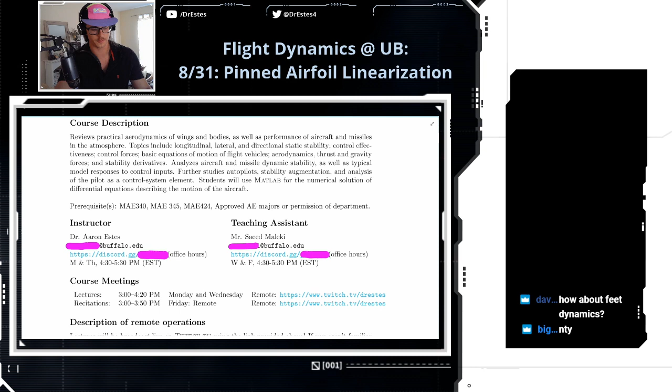Okay. So you can see I was updating this late last night. Okay. So I won't go too much into the course description as we look at the syllabus, because part of the lecture content is talking about the course. So I'll just skip this for now. But we're talking about flight dynamics.

And this is me, your instructor, Dr. Aaron Estes. And I just blanked this out here on Twitch, but you can see this if you get the PDF on UB Learns. And so I got my email. For office hours, I'm going to try Discord. I haven't tried it for office hours yet, but I think it has some interesting features. So I'm kind of interested.

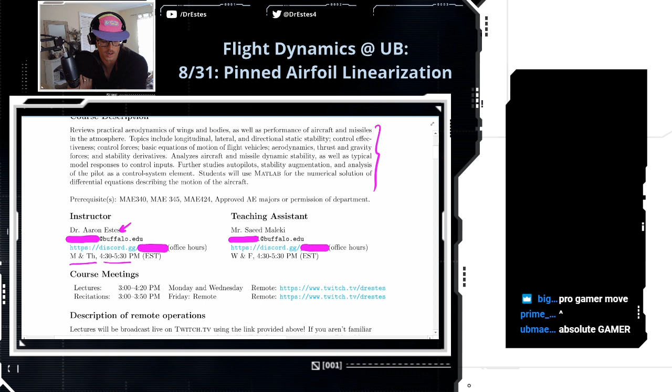Now, Mondays and Thursdays, a pro gamer move, yeah, using Discord. I know. So Mondays and Thursdays, I'm going to be there from 4:30 to 5:30. And then our TA, Saeed, he's going to be there Wednesdays and Fridays. So every day except Tuesday, you're going to be able to go to this Discord link, and it's the same link for the TA and me.

So every day except Tuesday, you can go there from 4:30 to 5:30, and you can video chat like you can on Zoom using Discord. You can also, I put a little math bot in there so you can type LaTeX formulas if you're into that. But yeah, we'll see how that goes.

Course meetings. Can you post a PDF of the handout annotated? Oh, yeah. My plan is, I'm going to write on these handouts myself, and I will post the copy that's filled in by me as well. That's my plan. So if you miss one of these, you can always go back to the video and fill in the handout yourself, but I do plan on also posting my completed notes for reference.

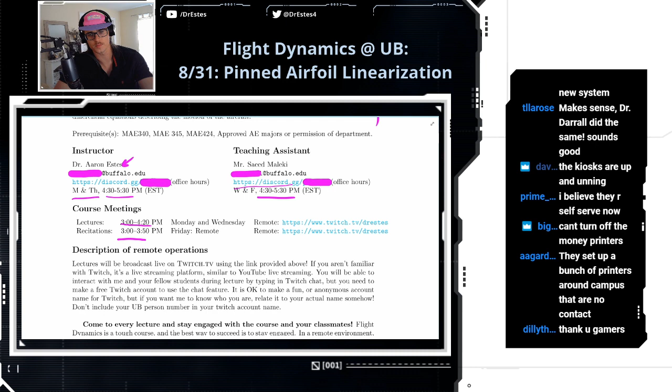And we meet here every time, so we'll keep it on Twitch. Just a quick description. If you're new to Twitch, you'll figure it out pretty quick. Let's see. Yeah, come to every lecture. That's my advice, because that's going to help you keep up with the content. Flight Dynamics is a very fast-paced course.

So I'm coordinating with Dr. Lagore's section, and we're trying to keep exactly the same pace, and it's a very fast pace. So I want you to come to every lecture so that you won't fall behind, because once you fall behind, it'll be a little bit hard to catch up. The easiest way to stay up to date, just come to every lecture. Okay. Textbook, we'll get to that next page.

Twitch chat, just be kind and courteous, common sense. Treat others the way you want to be treated. And other than that, have fun. I mean, Twitch is a fun platform. I kind of enjoy this. This is a more stressful time, COVID, but this is kind of just a fun platform. We can get together, relax a little bit, learn. And a lot of us are gamers here, so a lot of us are on Twitch anyways.

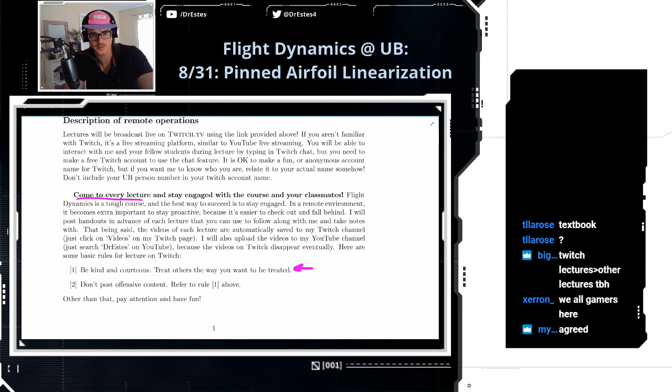Yeah, I enjoy Twitch. I just discovered chess on Twitch. Like, I'm no good at chess, but there's this guy, Hikaru. Do you guys know Hikaru? He's this grandmaster chess guy, and he streams chess. Anyways, super entertaining. I'm into that recently.

Okay, let's see. Oh, textbooks. Perfect.

Flight Dynamics Chess Tourney, I would come in last place. We could though, isn't it free, like chess.com? Oh, that's such a good idea, Flight Dynamics Chess Tourney.

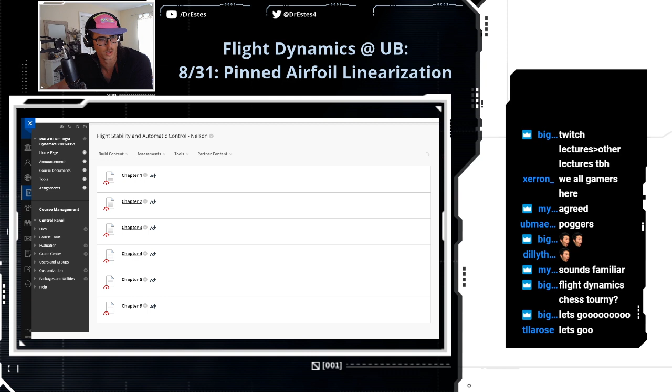So this number one, this is the book that we're primarily going to use. It's by Nelson, Flight Stability and Automatic Control. Now the nice thing is, if you go to UB Learns, let's do that. We have the first 6 chapters of that book here in PDF format. Or wait, the first 5 and then chapter 9. So we got the book right here. Beautiful. Okay. Yeah, like it says here, the Nelson textbook, that's the primary source, and the excerpts are available online.

I am not a student. Can I watch? No, you may not. No, of course you can watch. And I remember you, COD gaming lover. You took digital controls with me. Happy to see you here.

Okay, let's talk about the course requirements. You've already probably seen assignment number 1 is posted on UB Learns. And we're gonna try to have a weekly rhythm of homework. So my homework is posted at 2 p.m. on Mondays, and then it's due 2 p.m. the next Monday. And I'm just gonna try to keep that going, so just get in the rhythm of being used to that. So if you add it up, it's going to be somewhere between 10 and 12. We probably won't have a homework every single week, but expect that number of assignments.

And then for this class, we are doing 2 exams, a midterm and a final. And these are the dates that we're planning for, and we'll give you more details about that. But I think some of it is going to be a conceptual test, and I think that'll be online. So expect an online conceptual portion, and then expect a take-home portion that you'll probably have like 24 hours to work on. So more details to come, but that is my understanding of the tests right now.

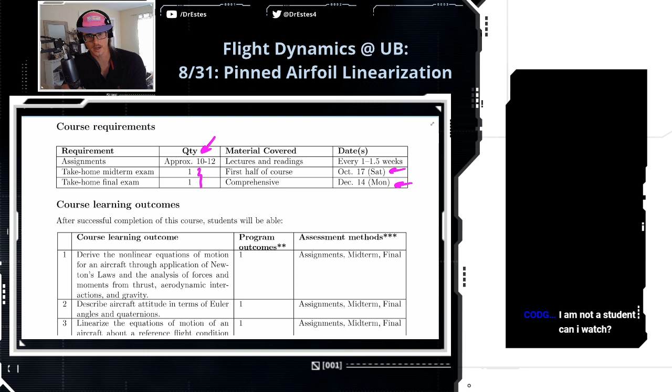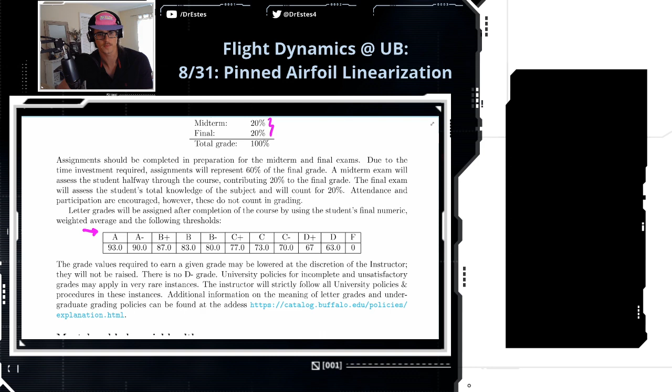Now, in terms of the weighting of the assignments, most of the weight falls on the homework assignments. So if you have 10 to 12 homework assignments, that's 60% of your grade. So make sure to do every homework and keep up with that. Come to office hours and work through it. And then that midterm and final I mentioned, each of those is 20%. Let's see, what else do I want to mention here? Here's our tentative grade breakdown, but we might change these a little bit depending on how the class is doing. And this is posted on UB Learns, so you can go through this in more detail.

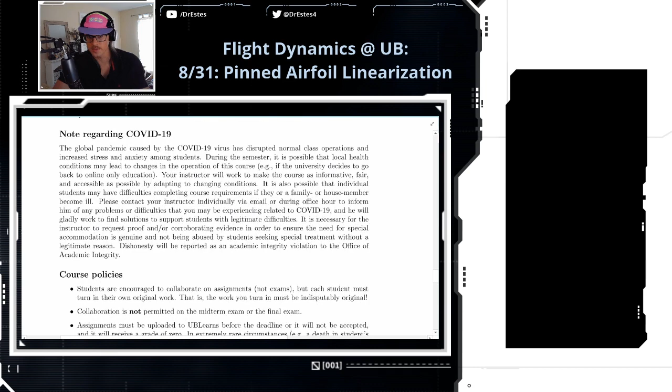Okay. And then we have a tentative schedule week by week. So go through this at your leisure. Let me know what questions you have. And that's what we're doing.

The main takeaway, I think, is stay engaged, keep up, be proactive about asking questions. If you're confused, don't feel like you're the only one. That is a myth, my friends. I went to college at one point, and I would be in a math class, and the person next to me seemed like they knew everything, and I was like, gosh, I must be the only one here who doesn't know what's going on. I find more often than not, if you have a question, the majority of the class also has a question. So just ease up on yourself a little bit. Be free to ask questions. Don't worry, guys. This class will be fun. Yeah, I think so. Okay.

With that, I'm going to switch modes to our notes for the day. Oh, good. Will the Twitch lectures be recorded and posted to be viewed at later dates? The nice thing about Twitch, as soon as this lecture is done, the video gets saved to my Twitch page. On top of that, I export it to my YouTube channel. There's some information on the syllabus, but just search Dr. Estes in YouTube and you can find the videos there as well. To reiterate though, come live, stay engaged. But if you ever miss a lecture, don't worry. You can catch up on it later in the day.

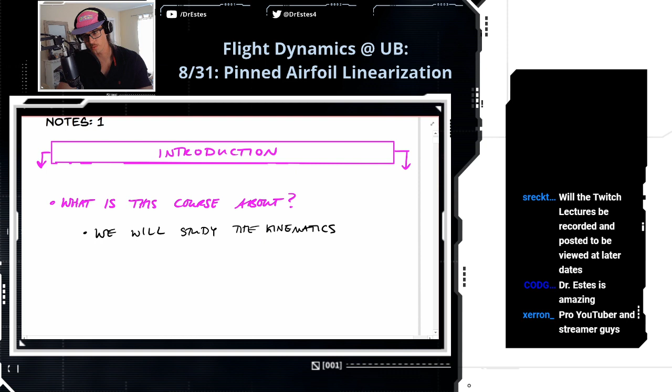All right. What is this course about? Okay. So it's flight dynamics, but let's break that down a little bit. We will study the kinematics. So that's like position, velocity, acceleration, angular acceleration. The kinematics and dynamics. So that's how the forces and moments affect the kinematics. You guys know this. Of aircraft.

Okay, why are we doing it? For the purpose of analysis, simulation, control, and design. So we're going to learn the theory so that we can make some high-level decisions about aircraft control and design. So next I want to talk about what types of problems we're going to solve, because that'll unpack this a little bit, make it a little more clear, I think.

Okay, so what types of problems are we going to solve? So the first problem, we'll have homework on this kind of stuff later. How do you set control surface and thrust conditions on an aircraft to achieve certain steady state flight conditions? Let me give you an example. Let's say I want to achieve level non-accelerating flight.

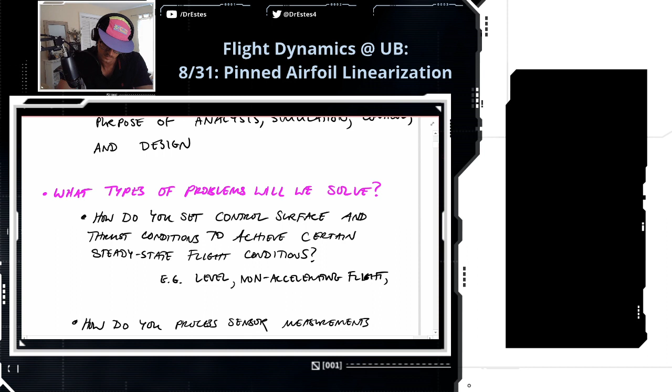So at some constant velocity with a certain rate of descension. Like we're preparing to land a plane or something. So if you give me some flight condition like this, how are you going to set the control surfaces? Like the elevator angle, the thrust condition, that sweet cruise attitude pointing down.

If you guys have seen Dr. Disrespect doing a flight simulator, have you seen that? He just drives it right into the ground. Flight simulator games are not easy.

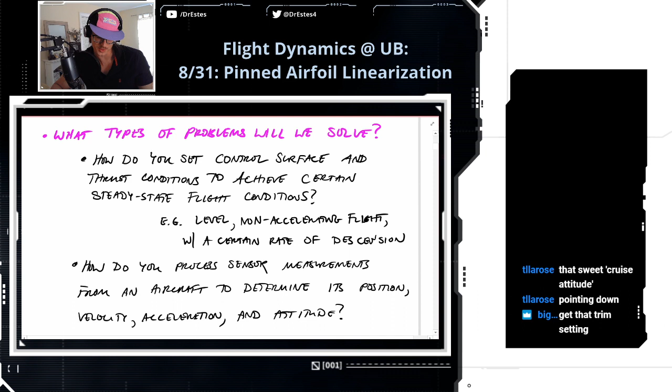Okay, let's look at another type of problem. So, how do you process sensor measurements from an aircraft to determine its position, velocity, acceleration, and attitude? So, for example, how to process sensor readings. Got banned. Yeah, that's right. How to process sensor readings from, let's say, an IMU, an inertial measurement unit.

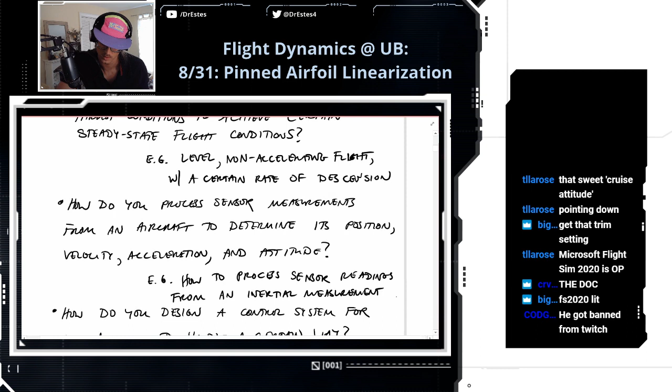So this is pretty cool. I forget which homework number it's going to be, but we have data from a quadrotor, and so this has an IMU on it. So we have angular rate readings from the gyroscope, we have readings from the accelerometer, and we're going to give you that data from a real quadrotor flight. And using those sensor measurements, we're going to teach you how to reconstruct the flight path.

And there's different ways to do it, like using Euler angles, quaternions. I know in intermediate dynamics you learned a bit about quaternions, so we'll use that formulation. So this is a nice practical skill you're going to get out of this class. If you have sensor readings from an aircraft, are you able to reconstruct what the aircraft was doing, what kind of forces it was experiencing? I like that one because it's a nice practical skill.

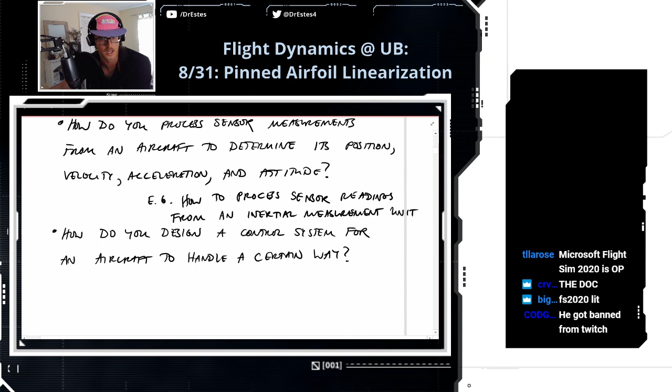And then so I'll leave you with this one. This is the type of problems we're going to finish the course with. How do you design a control system for an aircraft to handle a certain way?

Now, are any of you taking continuous control systems right now with Dr. Singh? He's a control systems guru, by the way, at the University of Buffalo. I bet probably a couple of you are taking that. I know aerospace engineers have a really packed schedule, though. It's hard to squeeze in those other ones. Nobody?

So we will design basic stability and control augmentation systems to meet given handling quality metrics. So we'll talk about the flight envelope and certain quality measures that are standard for flight.

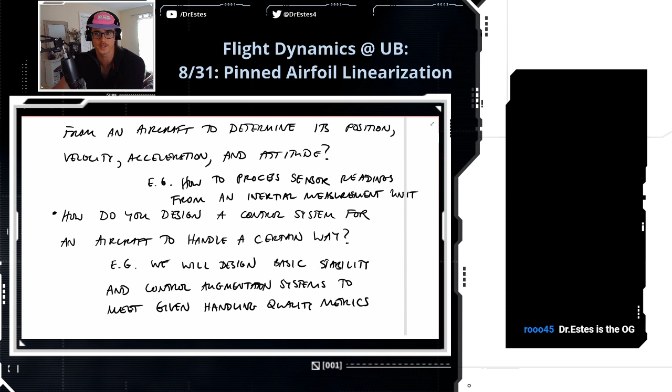And then, if you want an aircraft to handle a certain way, you might have certain overshoot and settling time conditions, like we learned in dynamic systems. We're going to learn about basic controllers to make the aircraft behave that way. So it's cool, that connection between some dynamic systems theory and now we're applying it in flight systems.

Dr. Estes is the OG. Hey, thank you. Okay.

All right, we're going to get into an example here.

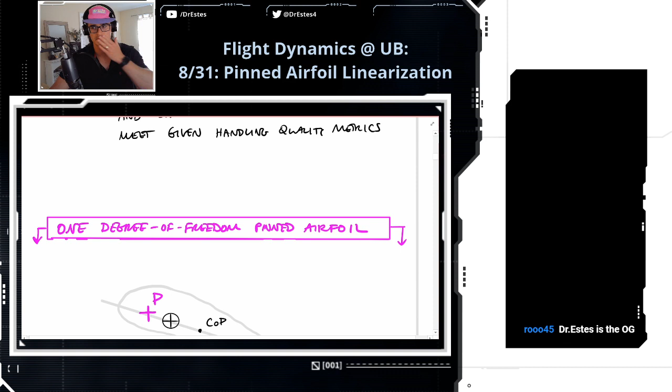So we're going to look at a 1 degree of freedom pinned airfoil. Why are we doing this example? So a lot of the analysis we're going to do in this class is going to involve nonlinear differential equations. And you'll see as we develop this that the equation of motion for this pinned airfoil is nonlinear. So just telling you right out of the gate, aircraft equations are nonlinear differential equations.

However, it's very popular to linearize these equations around some equilibrium point and then use those linear differential equations to do analysis. Dakota says rip. But linearization is our savior. Okay? So this example kind of encapsulates the type of analysis we'll have to do with linearization, and so that's why we're doing it.

So let's say this is a pinned airfoil. P here is the pin, and let's say it's a frictionless pin joint. So this airfoil can rotate about that, and we are providing this relative wind that's parallel to this gray line here, and U infinity, that's our relative wind velocity. All right.

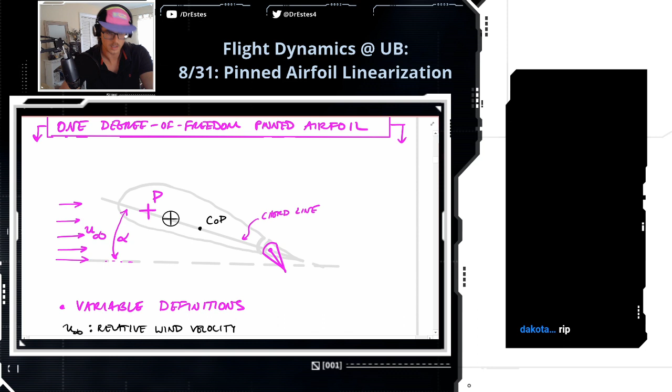This line on the airfoil is the chord line. So it's connecting the leading edge and the trailing edge. The angle between the chord line and this relative velocity, we call it alpha, the angle of attack. And these variable definitions, if you have the handout, you can scroll ahead a little bit. So that angle of attack is the second point here, the angle between the chord line and the relative wind.

All right, so this represents the CG right here. And that's where weight is going to be. Oh, I'm going to keep using pink. That's where weight is acting, assuming that gravity is acting just straight down. And that's going to create a moment about this frictionless pin joint. Yeah, there we go. W is the weight vector. Let's put a little arrow on top of it.

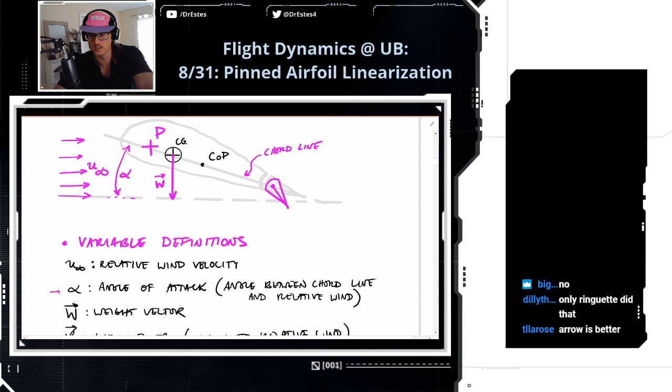For vectors, I'm used to using a line underneath the variable. Do any of you guys do vectors that way? I'm retraining myself to do the arrow on top for this course. Nobody does that? Yeah, I think the arrow on top is more popular. But it takes a little more effort to draw. Come on. Only Ringuette did that? Did Ringuette do the arrow underneath for aerodynamics? Arrow on the bottom seems crazy to me, says Opie. Well, I don't do an arrow on the bottom. I just do an underline. Okay. Anyways, I digress. I'm going to use arrow on top for vector.

Okay. So the COP, that is the center of pressure. That's where we can resolve the pressure distributions into just a lift and drag force, and we'll resolve it along the chord line here. So I'm going to put a lift vector generated by the pressure differential here, and I'm also going to put a drag vector.

And just as a refresher, the lift acts perpendicular to the relative wind. So you can see, if the relative wind's coming in this way, I got a 90 degree there. And the drag acts parallel. And I think I mentioned that a little bit.

Fake news? Arrow on the bottom. Vector notation, man. It's a very polarizing topic.

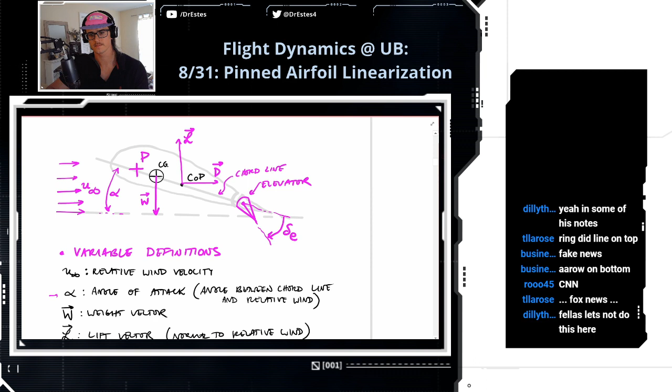Fake news, man. Okay, so we got the center of pressure, we got the lift, we got the drag vector. Okay, last thing here. We are going to be dealing with some actuated control surfaces in flight dynamics. And so the tail of an aircraft, that's where we see the elevator. So that's the little control surface at the trailing edge of the tail that we can actuate, and it makes an angle here, delta E. So that's the elevator angle.

Yeah, let's limit the political discussion in the chat. Okay.

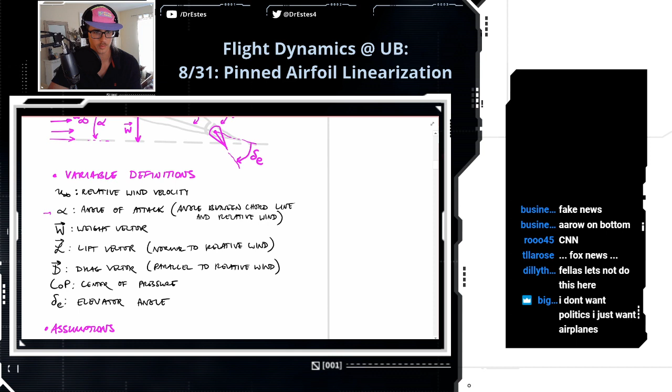Now what we're going to do next is make some assumptions, because we're going to work towards getting an equation of motion from this. So we're going to have to sum the moments about that pin joint, but we're going to make a couple assumptions first. Number one, we're going to assume that the angle of attack is small. And the reason we're doing this is I want to assume that the angle of attack is small enough that the moment about the pin created by drag is negligible.

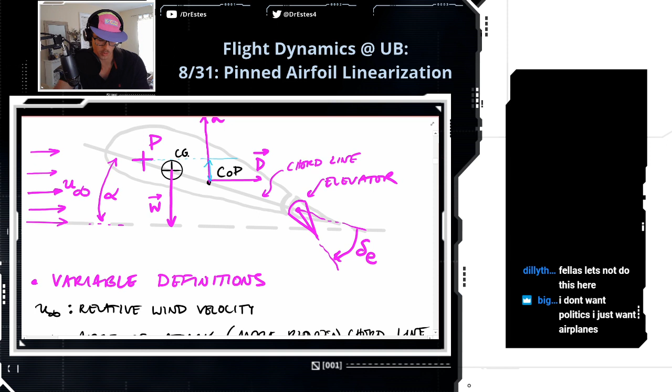So angle of attack is small. Well, how small? I'm employing this assumption so that it's small enough that the moment about the pin created by drag is negligible, so I can ignore it. Let me scroll back up to the picture a little bit here. Let's just zoom in. You can see that we got the pin here, and the drag vector has that little moment arm about the pin. So we're saying the angle of attack is small enough that this lever arm is going to be so small that the drag just creates a negligible moment. So once we start summing moments, we'll just forget about it.

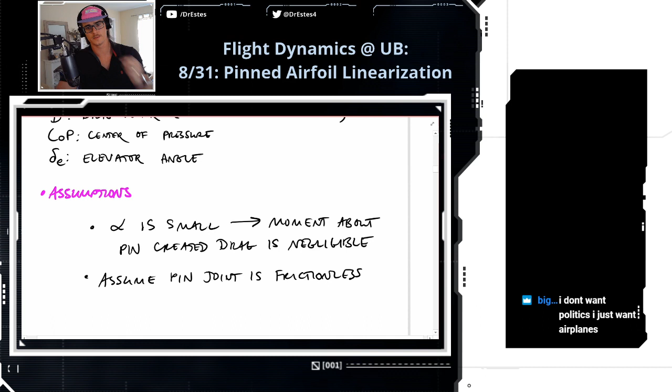Okay, that's assumption 1. Assumption 2, and I think I already mentioned this, but we're going to assume the pin joint is frictionless for now. So if there is an angle of attack rate, usually friction is creating a force proportional to velocity. So we're going to neglect the moment created by friction. We're going to assume that that pin joint doesn't create a dissipative torque or anything as this guy rotates. Okay. Assumptions 1 and 2.

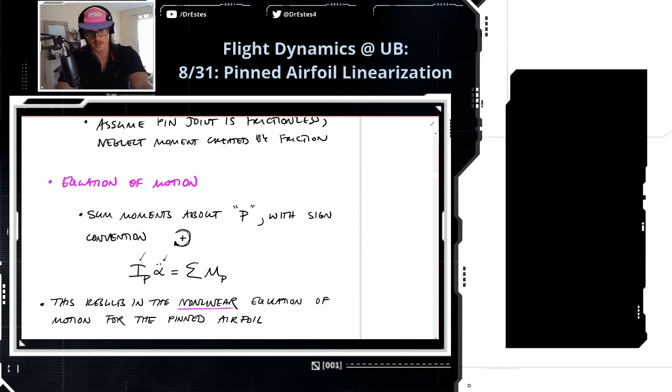Okay, so now we're going to get to the equation of motion. So we're going to sum the moments about the pin joint P, and we're going to use this sign convention, which is kind of opposite what you might usually see by the right-hand rule. So we'll consider moments that go this way to be positive. So we're going to have the moment of inertia about that pin joint times the angular acceleration is going to be the sum of moments. So that's just Newton's second law.

How about I bring this picture down here so we can have it as, or wait. I could write the sum of moments up here with the picture, and then I can copy and paste it down lower. So that's what we're going to do. Okay. So we're going to sum the moments about P. And we're going to assume this direction is positive.

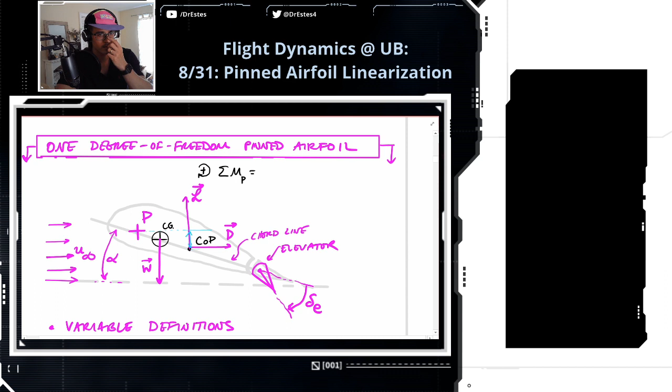Ooh, I forgot something important here. We've got to define some distances in this picture. So the distance from the pin joint to the CG, let's call that L1. So we need that moment arm. The other one, we need the distance from the pin joint to this center of pressure where the lift and drag is applied, and let's call that L2.

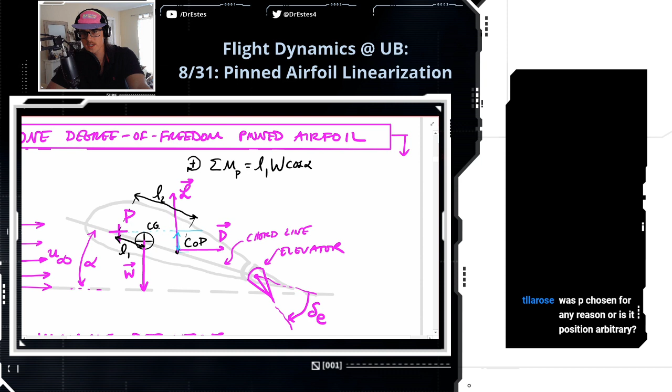Okay, so the first moment. Was P chosen for any reason, or is the position arbitrary? A little arbitrary in this case, along with the center of pressure and CG as well. Okay, so the moment about P caused by the weight, that's going to be a positive moment, and it's going to be L1 times the force, and then we're going to need cosine of the angle of attack, because that's going to be this perpendicular distance. Is the pin not at the trailing edge of the wing? No, in this case, this pin joint is close to the leading edge. So we're summing about P at the leading edge.

Okay. Now, from one of our assumptions, we said that the moment caused by the drag is negligible. So we'll ignore that moment. But the moment caused by lift is going to have this lever arm. So that's going to be minus L2 times the lift force, which I'm going to put here as a function of alpha. We'll get to that in a second. Cosine alpha. And finally, so we considered the weight, we considered the lift. From our assumption, we're ignoring the drag.

But the final piece is the moment on the wing is also affected by this elevator angle, okay? So we're going to add an additional term. This is going to be a moment coefficient for the elevator times the deflection of the elevator.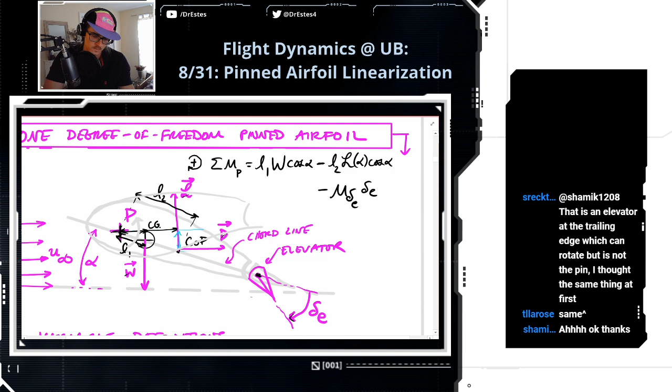Okay, so the pin that we're summing about is up here. So this whole airfoil, I don't want to make this too messy, but it could rotate, say, like here. So it's rotating about that pin joint. That's what we're summing the moments about. And then additionally, the elevator rotates about that pin at the end, and that also affects the moment. Okay, so that concludes our sum of moments for this example. And I'm just going to rewrite this equation down below. Okay.

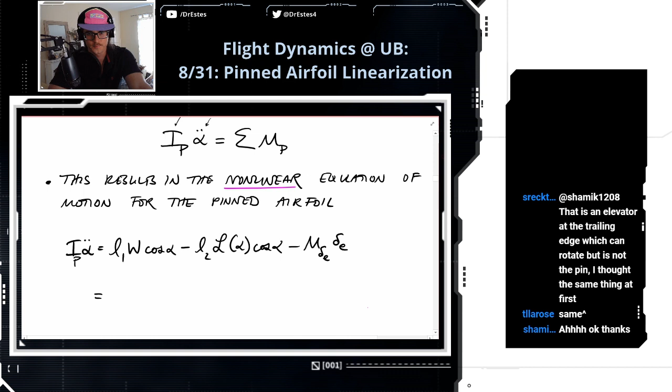So this results in the nonlinear equation of motion: L1 times the weight, cosine of the angle of attack, minus L2 times the lift force, also times the cosine of the angle of attack. Wait, I won't put parentheses because I didn't put it for the other one. And then minus this moment coefficient for the elevator times the elevator angle. And I'm going to take all this stuff on the right-hand side, and for some of the analysis later on, we're just going to call this a function of the angle of attack and the elevator angle.

Okay? So the moment of inertia about the pin times the angular acceleration is equal to a nonlinear function of the angle of attack and the elevator angle. So we've just figured that out by using Newton's laws.

So why is it that the angle of the elevator times the moment? Well, this is not a moment itself. We call it a moment coefficient, which is kind of a little bit like a hand-wavy thing, saying that if you deflect the elevator a certain amount, that's going to create a moment that's proportional to this coefficient. So it's kind of like a spring constant creates a force. You have like K times X equals a force, right? So in a similar way, I'm saying like this moment coefficient times delta is creating a moment. Okay? So that coefficient is not a moment itself.

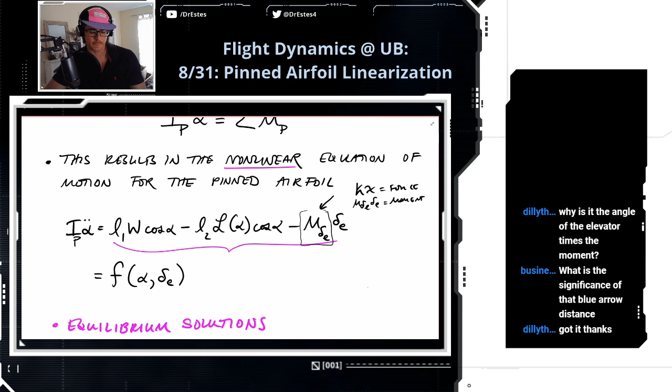What is the significance of that blue arrow distance? I don't know what you're talking about, my friend. Oh, this one. That's just a moment arm. So a moment is a force times the perpendicular distance about a joint. So about this pin joint over here, I have this lift force L, which is acting at this point down here. Or wait, that was for the drag force. So I was talking about the drag. So I got this force, and then the perpendicular distance is right here.

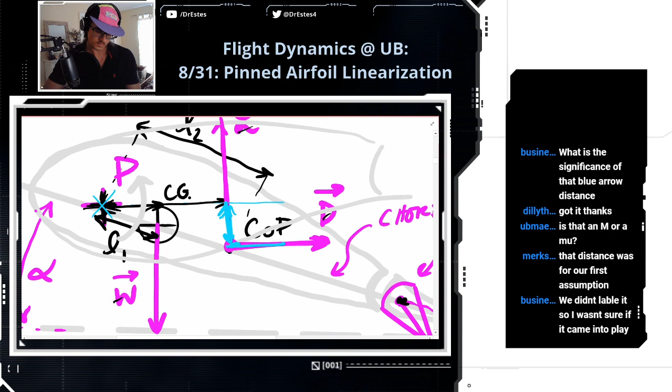Yep, for the first assumption. We didn't label it, so I wasn't sure if it came into play. Yeah, thank you for asking. But yeah, that was for the moment created by this drag. We're ignoring it. We made a simplifying assumption. Okay, yeah, right. I didn't put it in the table. Okay.

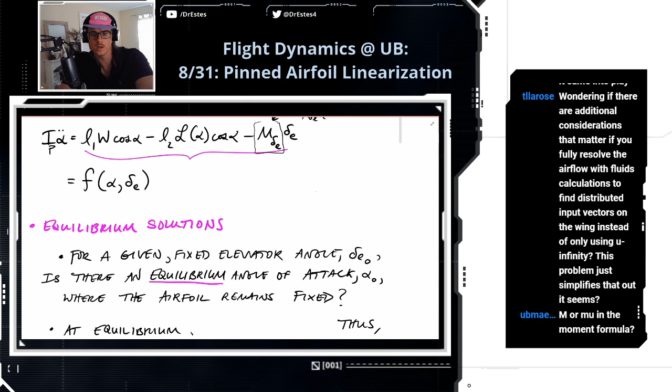So, equilibrium solutions. So this is the first question I want to ask. Let's say we fix the elevator angle to a specific angle. Wondering if there are additional considerations that matter if you fully resolve the airflow with fluids calculations? Yes. Short answer to your question, this is just a simplification. We're resolving that relative airflow into, if you integrate over the surface, these simplified point loads. M or mu in the moment formula? Pretty sure mu. Oh, this is a capital M. I'm just using a capital M.

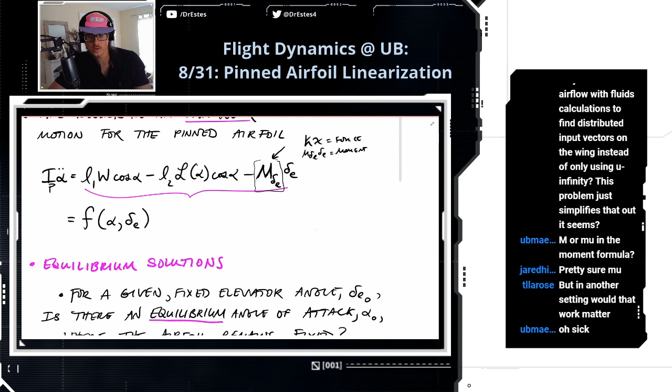In another setting, would that matter? Sure it would. We're just starting. This is a simplified example that we're starting with to illustrate how, even for a simple case, you get a nonlinear equation of motion. But in most applications, even serious commercial flight, you're going to convert these to linear equations. And that'll be suitable most of the time. Okay.

So if we have a given fixed... Cues Gangsters Paradise, Coolio. Learning about flight dynamics when Microsoft Flight Simulator is at an all-time peak. Also makes sense. This also models structural response suitably already. Yeah.

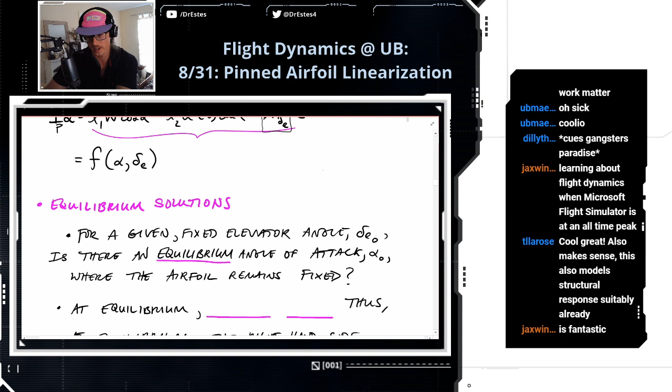Okay, so we're going to say, what if I fix this elevator angle to like 5 degrees? Let's assume that it's not moving around. Is there an equilibrium angle of attack where the airfoil remains fixed? So imagine this. You have this pinned airfoil in a tunnel. You have some incoming wind with some velocity, and I fix the elevator angle. If I configure the airfoil at a certain angle, can I find one so that it'll just stay there, fixed in the wind?

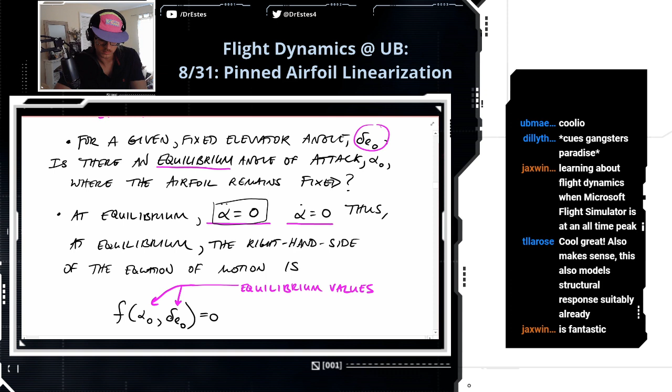So at equilibrium, this is what equilibrium means. The angular acceleration will be 0, and the angular velocity will be 0. That's just a mathematical way of saying this airfoil is fixed. It ain't going anywhere. If the angular acceleration is 0, that means that the right-hand side of our equation of motion, which, remember, was the sum of moments, is going to add up to 0. So I have this function f on the right-hand side, which is the sum of moments. If the angular acceleration is 0, then this right-hand side must be 0.

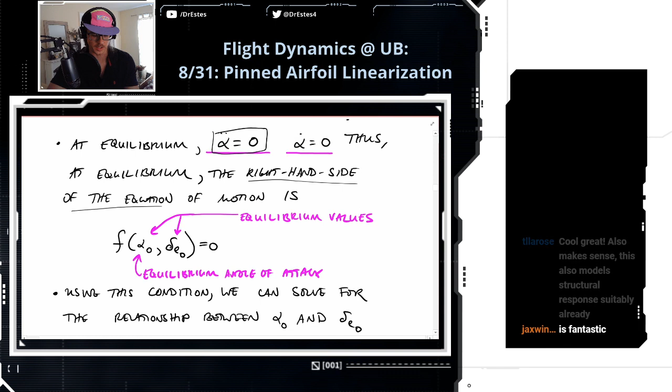So all this is saying is, if you plug in this equilibrium angle of attack, if it exists, that right-hand side should be 0. Okay, so the first thing we're going to do, we're going to solve for that angle of attack. It does indeed exist. So we're going to use this condition here to solve for it. So let's take the right-hand side of that equation and set it equal to 0. Okay, so I'm just going to grab it from up here.

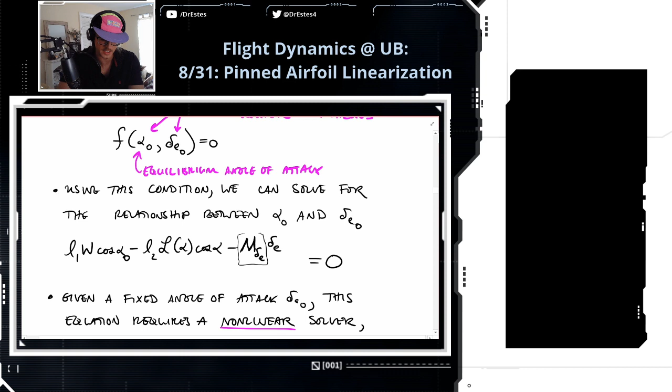Copy. Paste. And what we're going to do, we're going to substitute in that this is at the equilibrium. So we have to add these little subscripts that indicate, oh, and I got to even put one in here, that this is at equilibrium.

Now, this exact equation, or something very close to it, you're going to have to solve in your first homework for the equilibrium angle of attack. I think we say, if you fix the elevator to 5 degrees, what's the equilibrium angle of attack? So what you're going to find is that this equation is nonlinear in alpha.

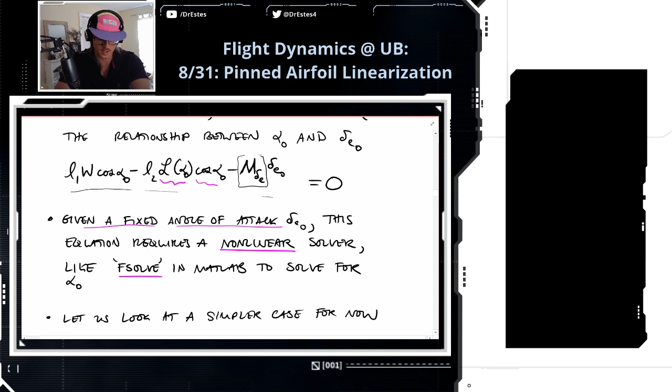So, well, we're going to get to this lift term in just a second here. But you have this term which depends on alpha multiplying with cosine of alpha. And so the point that I'm making here, if you're given a fixed angle of attack, this equation, it's nonlinear. It's going to require a nonlinear solver like fsolve in MATLAB to get that angle of attack.

Have you guys used fsolve before? Maybe on Friday I can do a little example with that too. You've used it? Okay. Perfecto. Then you're going to be all set to solve this equation. So we're not going to do that right now. We're going to simplify this for the sake of the lecture. So let's look at a simpler case. Yeah, I agree. We'll do an example. Okay.

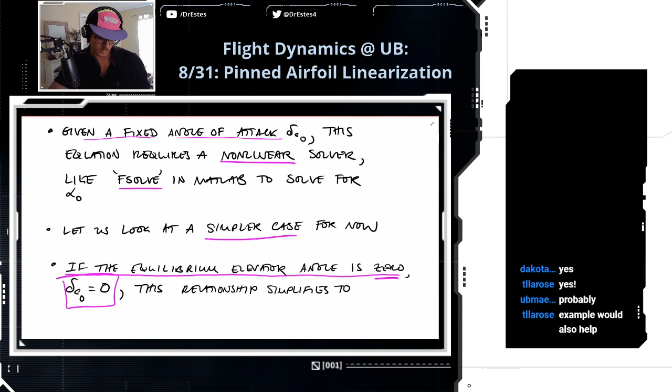If the equilibrium elevator angle is 0, that is, if instead of 5 degrees or something, we just set it equal to 0, then let's zoom out a little bit. I'll grab this. So this last term, the elevator, we set that equal to 0, so that term goes away. So we're going to have this is equal to 0. And then this becomes much easier because I can divide both sides by cosine. And then, let's scoot this down a little bit.

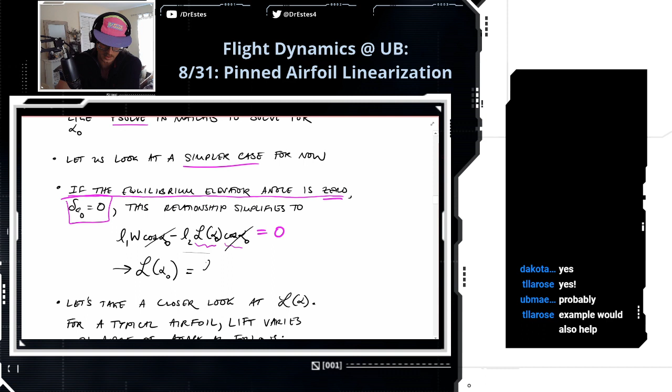What you find is this lift, which is a function of that angle of attack, is L1 over L2 times the weight. Maybe I'll just put a little box around that. So what we're saying is we got this pinned airfoil in the wind. If we set the elevator angle to 0, then the airfoil will be at equilibrium if the lift is equal to L1 over L2 times the weight, where remember, L1 and L2 are some different distances from the pin joint.

Well, okay, that's the lift, but what's the actual angle of attack? So let's take a closer look at this lift. How does it depend on the angle of attack? I think you learned this in aerodynamics. I'm sure this looks familiar to you. So lift increases with angle of attack. As this angle of attack gets bigger, lift gets bigger until what?

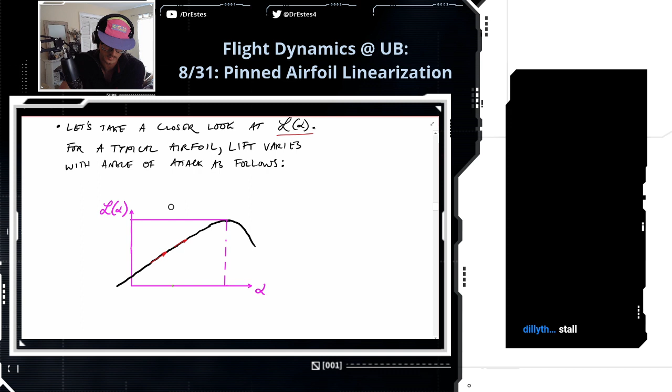This point right here, where approximately we have maximum lift. What's going on here? Connect this line over here. Stall. That's right. So this angle of attack, where if you go beyond it, you see this lift is dropping off, right? This is our stall angle of attack. And that happens, I don't know, like 15 to 20 degrees typically for most airfoils. So just have that figure in your mind.

But you're going to generate your maximum lift. Yeah, close there. You're going to experience a loss of airspeed because you also have a lot of drag here. Okay. So we point that out. But in this airfoil experiment, there's another angle of attack. And let's say this is the equilibrium angle of attack, where in this lab setting, it's going to remain fixed.

So we know from above, if the elevator angle is 0, the lift at this equilibrium angle of attack is L1 over L2 times the weight. So if we could find a configuration where that is the lift, then we know that is the equilibrium angle of attack. If it's a stable equilibrium, I'll just draw this in here because this will become a little bit relevant later.

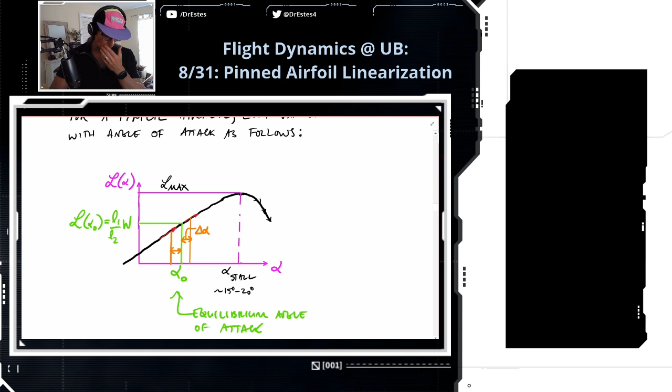Okay. So this is a graphical representation of lift, how it changes with angle of attack. There's also this expression for the lift, which I'm sure you've seen in aerodynamics. So let's point out a few of these terms here.

Rho, we know that is the air density. U infinity is the relative wind velocity. And S, this is the planform area. Basically, if you looked at the airfoil from the bottom, what kind of shadow would it cast? So it's that area underneath.

And then we have here the coefficient of lift. So this is a mathematical expression for how lift changes with alpha. From the graph above, we know that from experiments before stall, lift varies linearly with the angle of attack. It just goes up like a straight line. So we're assuming this stuff is just a constant before this coefficient of lift.

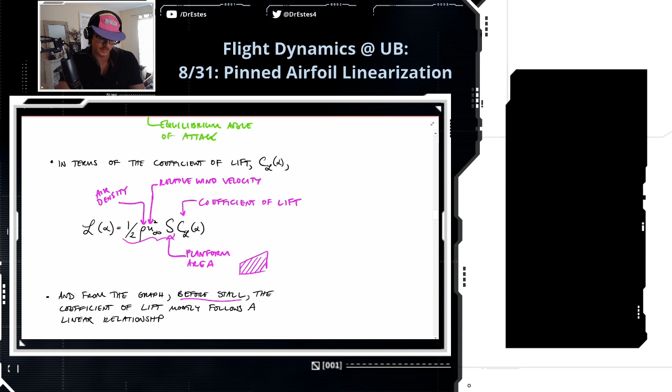So this coefficient of lift depends linearly on alpha, and we're going to say it's equal to this to express that linearity. Oh, that looks a little bit sloppy. I'm going to try to make this cleaner.

Okay, so first the coefficient of lift. We're going to take the partial derivative of that with respect to the angle of attack and multiply it by the angle of attack. And we're going to say that this term for now is a constant. So all this is saying is the coefficient of lift is like a constant times alpha. It varies linearly with alpha, and that reflects what we see in the graph.

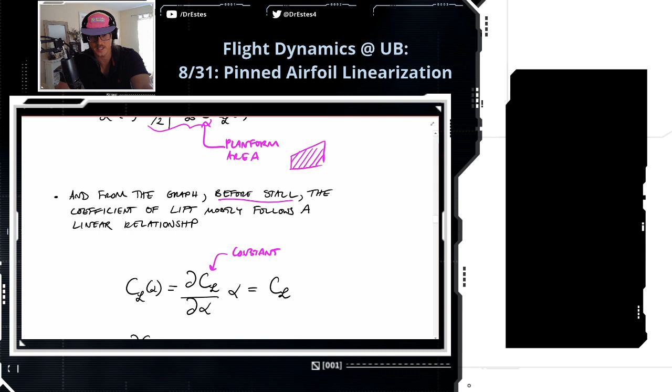Here's some notation that we'll use in the class, because there's going to be a lot of these partial derivatives that we encounter, and it's a little easier to indicate these partial derivatives as an additional subscript. So coefficient of lift sub alpha is the same as that. I know, we're going to have lots of subscripts flying around, but it'll simplify the notation a little bit.

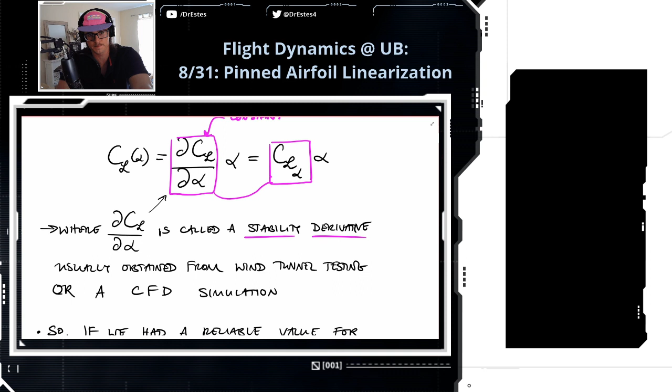Now, we call this partial derivative a stability derivative. Why a stability derivative? Well, it does affect the stability, whether this airfoil would diverge from equilibrium or settle back to where it originally was. And how do you get this stability derivative in practice? Well, you could do a wind tunnel test to get a graph like we saw above so that you could figure out what that slope is. Or you could do a CFD simulation and also get a graph like that. Okay.

Lest we forget what we're doing here, I feel like sometimes when we go through the math, it's like, wait, what problem were we even solving here? But let's get back to the point. We're trying to solve for the equilibrium angle of attack for this airfoil. Now, if we had a reliable value for this stability derivative, we could calculate the equilibrium angle of attack from this formula.

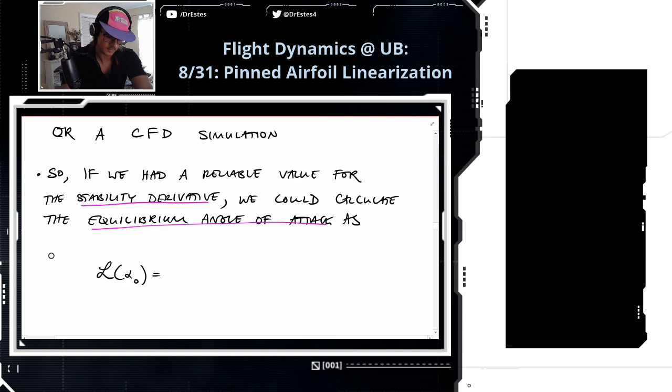So the lift at the equilibrium angle of attack, well, we know that mathematically the lift can be written like this. So I'm just using that expression, and I'm gonna write this out fully right now. This is the lift evaluated at this equilibrium angle. So I have to evaluate this stability derivative at the equilibrium angle, which if this was a constant, then I guess that doesn't really matter. But all of this is times the equilibrium angle of attack.

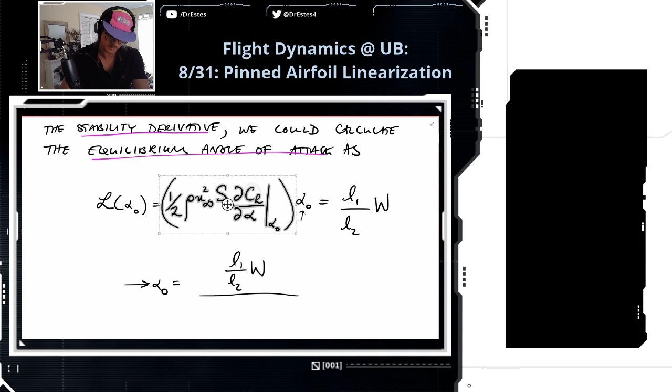And we already determined that if the elevator angle was 0, the lift has to be equal to this at equilibrium. So voila. From here, we can solve for our equilibrium angle of attack. We just got to divide by this stuff on the left-hand side. Boom.

So if you know this stability derivative here from some experiment or some simulation, this angle right here, alpha naught, is where we can position our airfoil in the flow, and it'll just stay perfectly still. Okay. So this equilibrium point is important when it comes to linearization.

Are you guys still with me? Are you feeling okay? Do you feel totally lost, or is this somewhat clear? I know we're blasting through a lot of math here. All good? Okay, good. All right.

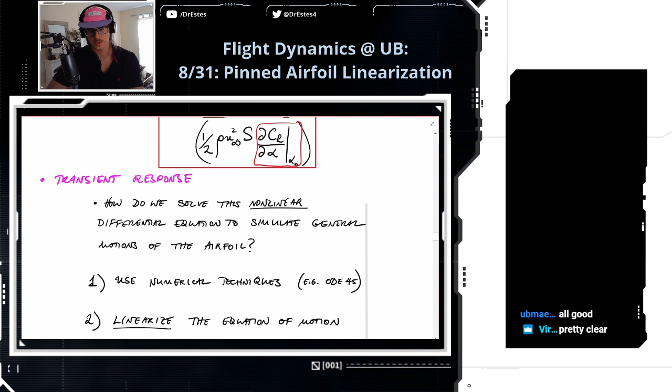So let's get to the transient response here. What I'm talking about here is the dynamics of this airfoil. How is it going to move around in the wind if I perturb it a little bit? So if you guys have ever solved a nonlinear differential equation, we're going to have two approaches here.

Approach one is you could just directly solve the nonlinear differential equation using some numerical technique. So ODE45, that's going to be our choice method of integration in this class for nonlinear systems as well as linear. But what we're going to talk about for now is another option: to linearize the equation of motion about an equilibrium point. So that's why we solve for the equilibrium point. And we can solve for what are called perturbation dynamics. You might have an idea of what those are already. So we're going to investigate this option of linearization.

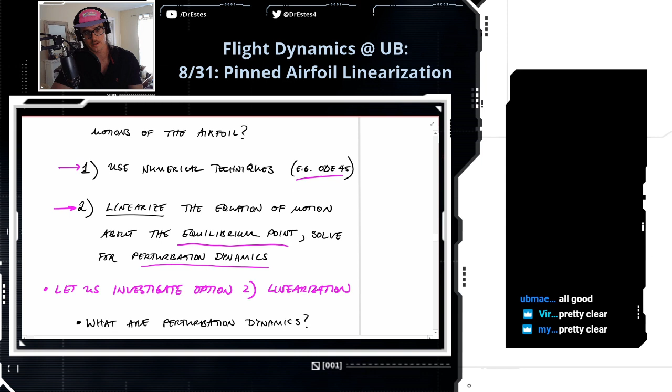You may be asking yourself, what are perturbation dynamics? Well, first, let's define what a perturbation variable is. So I got this below.

So we have, does anyone know how to make a 3D animation of ODE 45? Oh, you mean like integrate something and then do a 3D animation of the motion? Oh yeah, you can do that.

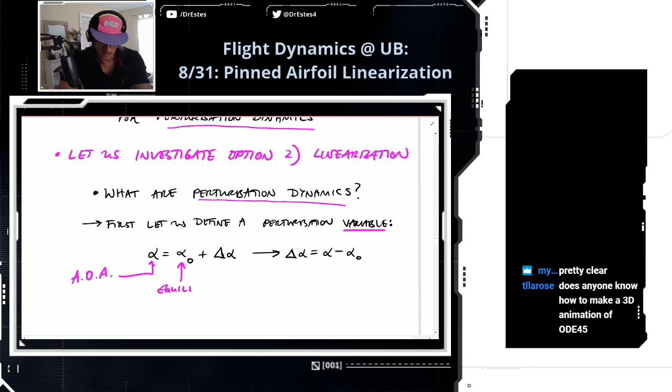Okay, so this is the angle of attack. You could write that angle of attack as the equilibrium angle of attack plus,

Brad did that in a lecture this past spring. Yeah, I know Brad does some cool animations.

Okay, this delta is the perturbation variable. Now, the point here is that it must be a small deviation from the equilibrium value. Okay, so you can take the angle of attack, express it as small deviations from some equilibrium.

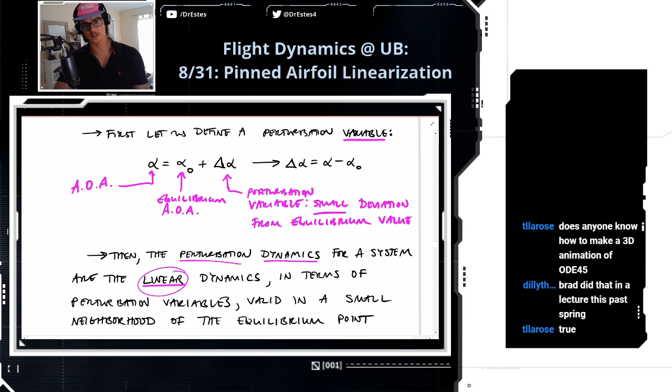And then, what are the perturbation dynamics? So the perturbation dynamics for a system are the linear dynamics. And these will only be linear if the perturbation is small. So we'll show that in a second. The linear dynamics, and it'll be in terms of the perturbation variables, and it's valid only in a small neighborhood of the equilibrium point. So that equilibrium angle of attack we solved for up above, these perturbation dynamics that we're going to get are only valid close to that equilibrium angle.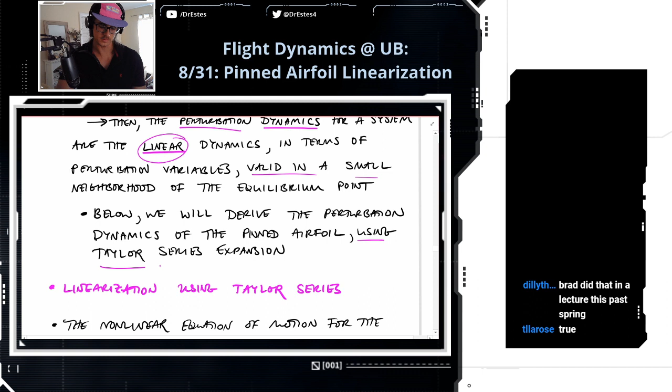So below, we're going to derive those dynamics using Taylor series expansion. And the reason we're doing Taylor series expansion is because it's very general. You can apply this to any nonlinear system. Have you guys used Taylor series specifically for linearizing a nonlinear differential equation before? I'm going to try to be really systematic with it. I know there's different ad hoc ways of linearizing, but this way is very formulaic, tried and true. It's procedural. So that's how we're going to do it. You did it in 376. Perfect.

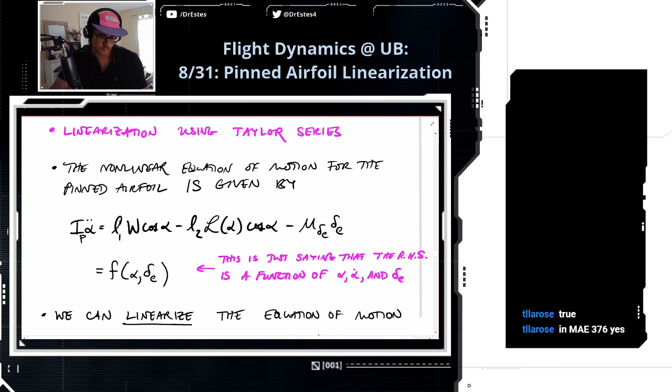Okay. We're just getting up to speed too. You know, it's been a long summer. Everybody needs a refresher.

Okay. So I rewrote that nonlinear differential equation. And like I said, the right-hand side,

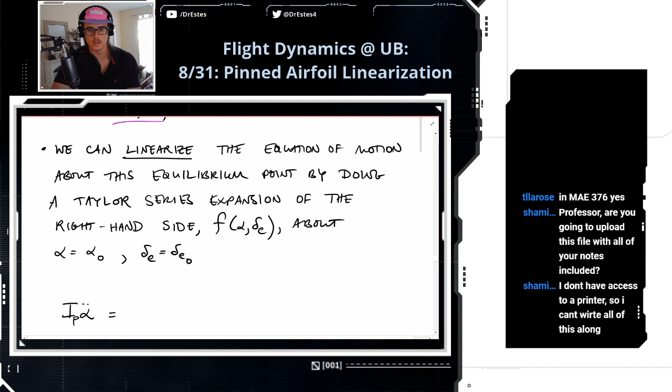I know I don't have access to a printer, so I can't write all of this along. I know that's the case for a lot of you.

Okay. So we can linearize the equation of motion about this equilibrium point by doing a Taylor series expansion of the right-hand side about these equilibrium conditions. So the right-hand side is equal to a function of the angle of attack and the elevator angle. And here is how Taylor series works. It says that that function can be expressed as the function evaluated at the equilibrium values, alpha naught and delta E naught, plus the partial derivative of that function with respect to alpha evaluated at these equilibrium values times the perturbation variable in alpha.

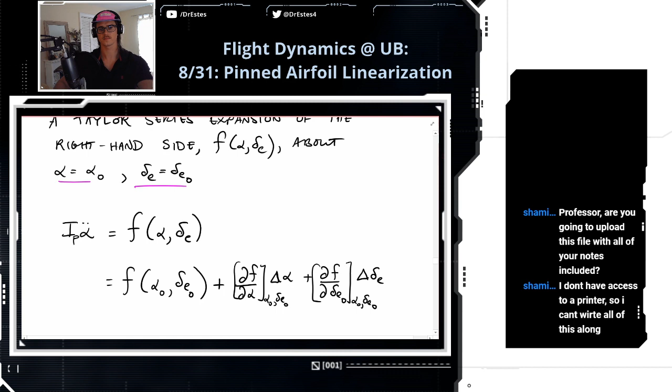And then you also differentiate this with respect to our elevator angle, also evaluated at the equilibrium values. And then additionally, you would have the second order partials and beyond. So this equality holds if you include all of these higher order terms, all right? But we're not going to include those higher order terms. Nobody's got time for that. Let's be real.

This is the definition of our perturbation variables once again, the deviation from the equilibrium. So here's why it becomes important that these perturbations are small. The higher order terms are going to involve products of the perturbation variables. Like if you have the second order partial, it's going to be multiplied by delta alpha squared, or you might have delta alpha times delta delta E. Okay, well, because these variables are small, these higher order products are negligible. Like if you take 0.1 times 0.1, it becomes an even smaller number.

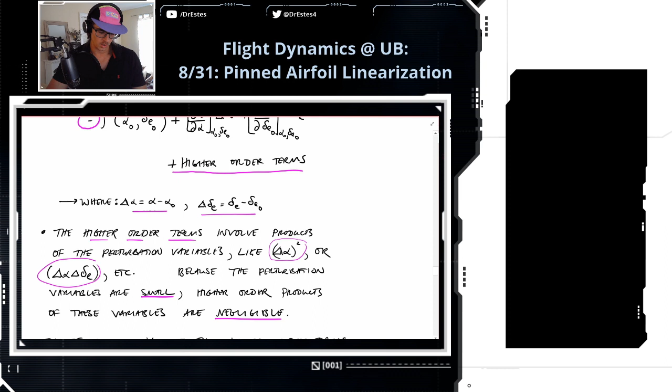So if we ignore the higher order terms, we are left with the approximate relationship. Let me copy this from up there. So we're going to say this right-hand side, ignoring the higher order terms, is just the nonlinear function evaluated at the equilibrium plus these partial derivatives times the perturbation variables. You guys have seen this before in 376, I'm sure.

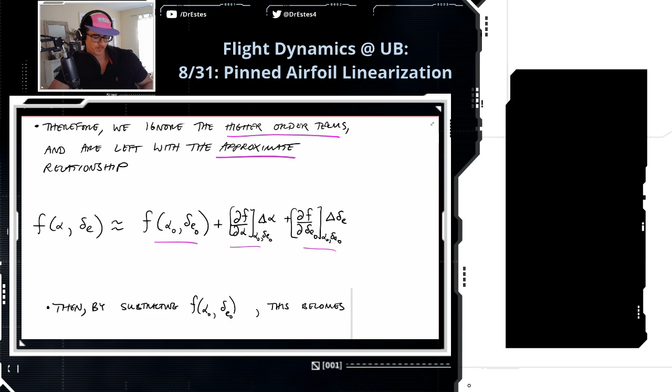And if we subtract the function evaluated at equilibrium, we're going to be left with this. So I'm subtracting this from both sides. Let's just write this out.

Okay. So I want to show you something here, relating this to our original nonlinear differential equation. Like this right-hand side, F was the sum of moments, which was equal to the moment of inertia about P times the angular acceleration. And then this would be that evaluated at the equilibrium conditions. Well, we know at equilibrium this acceleration should be 0 anyways, but forget that for now.

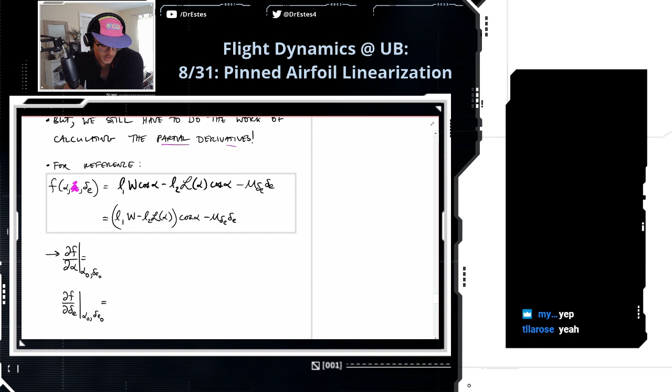We have to do the work of actually calculating these partial derivatives because we want to substitute those in here. So let's do those partials so we can finish this up. I included this for reference. Actually, this isn't a function of alpha dot, but this is our right-hand side. First we want the partial with respect to alpha, and then we'll evaluate it at the equilibrium conditions. So let's do that.

Okay, so we have to do a product rule here because we have a function of alpha multiplying a function of alpha. So I'm going to take the derivative of this first and multiply by the cosine. So I'm going to have minus L2. This term goes away because it's not a function of alpha. So we're going to have the partial of the coefficient of lift with respect to alpha, evaluated at our equilibrium points, and that'll multiply cosine evaluated at the equilibrium. But we have to finish this product rule.

So now we're going to have minus L1W minus L2L at alpha naught, times sine, because I was taking the derivative of the cosine here. Oops. Sine alpha naught. And then this elevator angle stuff is not a function of alpha, so this is it.

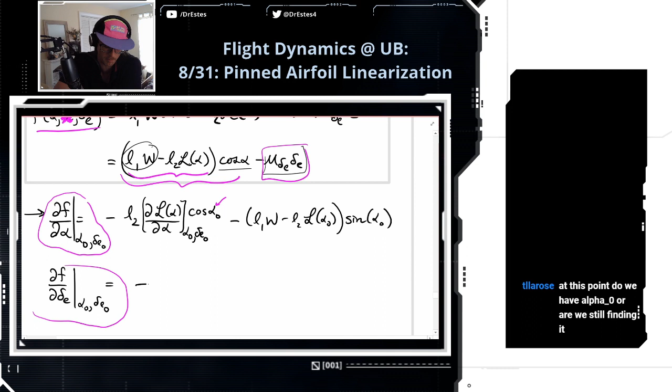Okay, let's leave this for now. Let's do this other partial derivative, the derivative of f with respect to the elevator angle. Fortunately, that one's a lot easier because the only thing that's a function of the elevator angle is this term. So it's just going to be minus that coefficient. Boom, done. That was the easy derivative.

Okay, I'm going to plug this in here, and then I think we'll wrap this up for the day. I know we talked about having an equilibrium elevator position set equal to 0, but this math we've done for this linearization portion is generic, where that equilibrium position could be anything. So let's write out that equation in that case. I'm going to bring this down for reference, and then we'll just write it out, and then we'll be done.

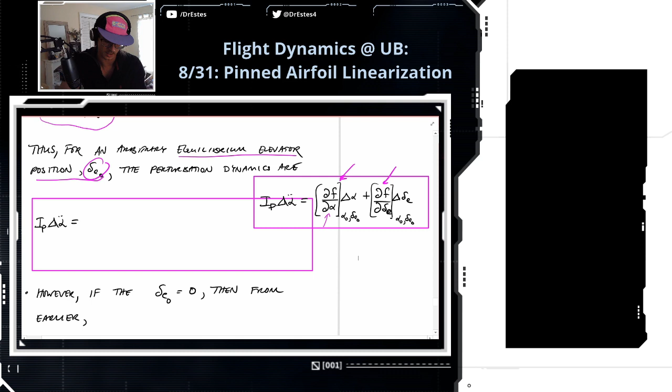Okay, so I'm going to put this to the side. Is that going to help me if I move it here? We'll just creep it in there a little bit. Okay. Well, it's this partial times delta alpha. So to save time, I'm just going to copy this. And now I regret having this encroach on the box, but that's okay. So I take that whole thing. Let's stick with this color. I take that whole thing, and now I can remember this, so I'm going to erase it. And I multiply this by delta alpha.

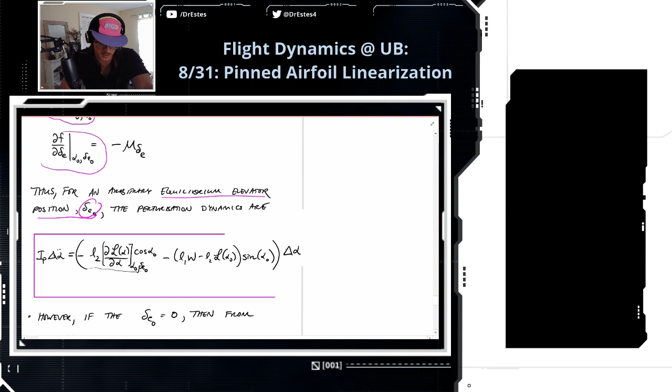And it's good to remember here, when you plug in all of the equilibrium values into this expression, it's just going to be a number. It's going to be a constant times delta alpha.

Okay, and then the other term, Eraser Pro. Yeah, thank you. Thank you very much.

So our next term is this times that perturbation elevator angle. Boom. So this is a linear equation for an arbitrary fixed elevator angle.

Now, okay, so we're out of time, but what we're going to do next time, we're going to finish this handout, and you're going to see that we end up with some equations that you're used to seeing in dynamic systems. So that's the connection here, that we're going to end up with some linear equations that you're used to dealing with, and that's really powerful because you're going to be able to predict what the motion of these aerodynamic systems is like.

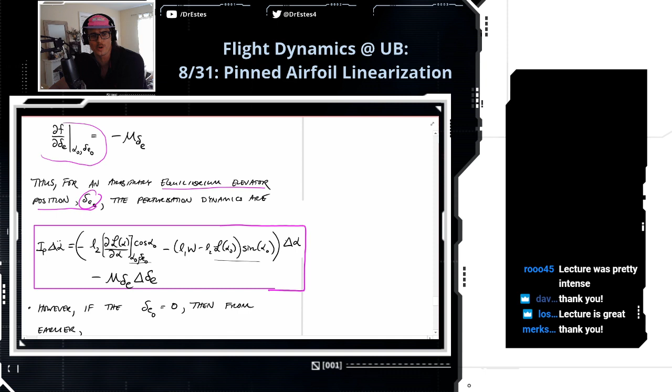Lecture was pretty intense. I know, I feel like I was kind of blasting through here. I'm trying to get the pace right, you know? Like I said, it's really fast paced, and I don't want to fall behind the other section because I know they're going to be blasting through as well. So yeah, we'll keep the pace up, but I'm going to try to keep it clear. If you guys at any point are like, dude, I have no idea what's going on, please feel comfortable to let me know that. And I'll do my best to clarify things. And I think that's what you guys are doing this lecture. You're just asking questions, and I hope you always feel the freedom to do that.